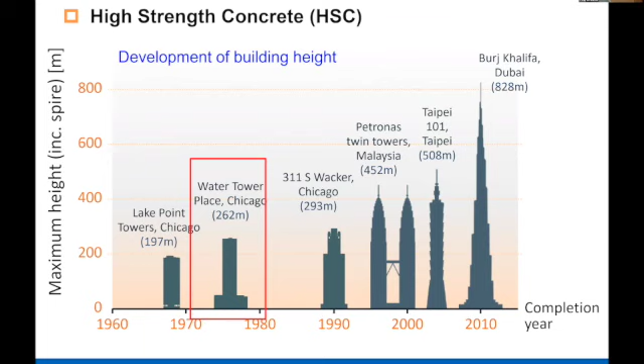So my talk, in the beginning, I'm going to talk about why we need to go in the direction of nanotechnology. As many of you know, we have made tremendous progress in the last few years in improving the strength of concrete. This can be seen if you look at the heights of tall buildings where concrete is the structural material. Here I've shown Burj Khalifa, which is more than 800 meters tall, and a new building called Kingdom Tower in Saudi Arabia, which is going to be a kilometer long, made out of concrete as a structural material. This is because we know how to increase the strength of concrete.

My interest in so-called high-strength concrete started with the construction of this water tower, an iconic building in Chicago, designed by Skidmore, Owings and Merrill. The material supplier said they could give us high strength concrete, and at that time high strength was about 50, 60 megapascals, or 9,000 PSI. They said, okay, show us how strong you can make it.

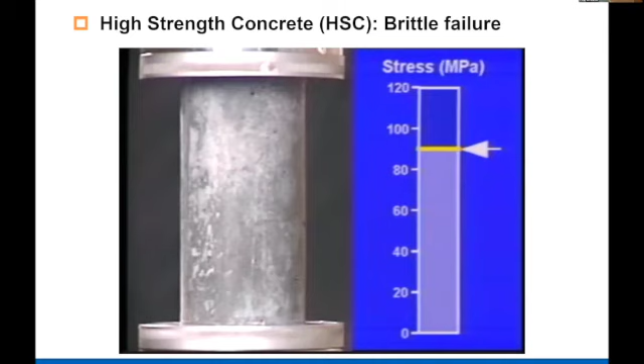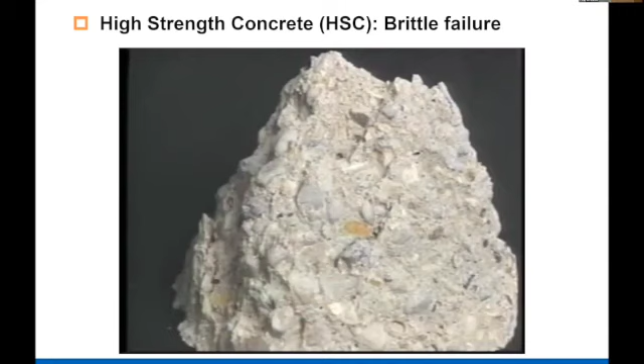So they went to the laboratory and tested a concrete cylinder of high strength concrete, and you can see this goes up to about 100 megapascal, but the failure was very brittle. So they said, how can we use such a strong but very brittle material? That's where they came to my laboratory. At that time, I was at the University of Illinois in Chicago. If you look at the last slide, the collapse was an expansion of circumferential cracking. So we said it's about how you test it.

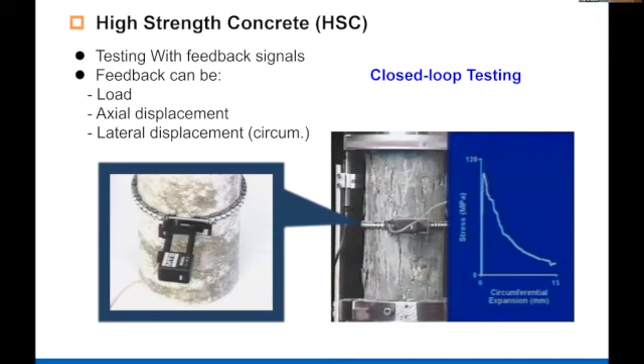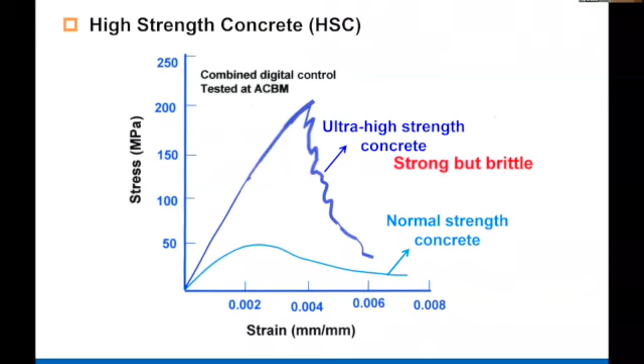If you test the material while controlling circumferential expansion, you get a very stable response, as shown in the next slide. Here I've shown a stress-strain curve when you compress normal strength concrete, which is about 50 megapascal, and what we now call ultra-high strength concrete, which is 200 megapascal. You can see it's possible to get a stable response, but after the post-peak, the ultra-high strength concrete is almost like glass—vertical, very brittle. It doesn't have what we call the strain-softening response of normal concrete. So in order to use ultra-high strength concrete, we have to reduce the brittleness or increase the toughness.

Currently, the main way we do this is by introducing fibers.

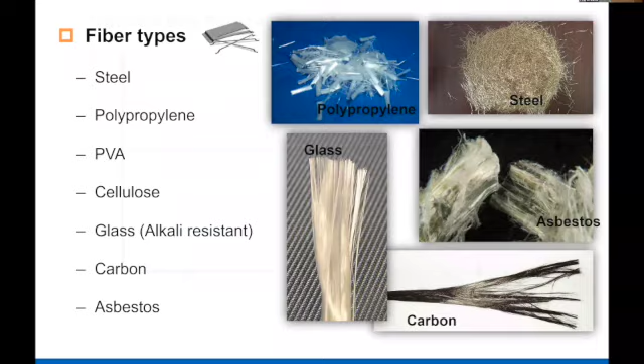The idea behind fiber reinforced concrete came, at least initially, from the classical concept of brittle materials—looking at brittle material using the Griffith fracture criteria. If you look at the relation between fracture and flaw size, smaller the flaw size, higher the tensile strength. So the thinking was that if you use fibers as opposed to pre-stressing bars or reinforcing bars, you can keep them closer together. Initially, the fibers we were using, and still use in fiber reinforced concrete, are about 30 to 40 millimeters long, with an aspect ratio of about 50 to 100.

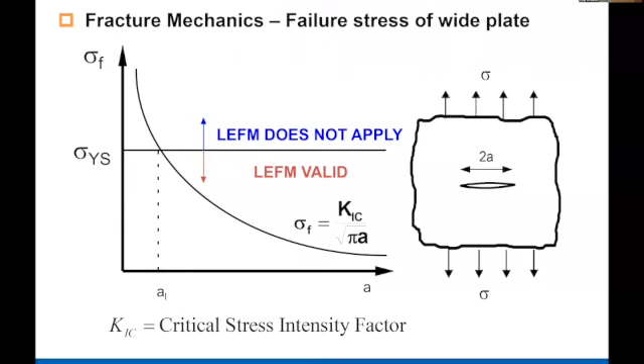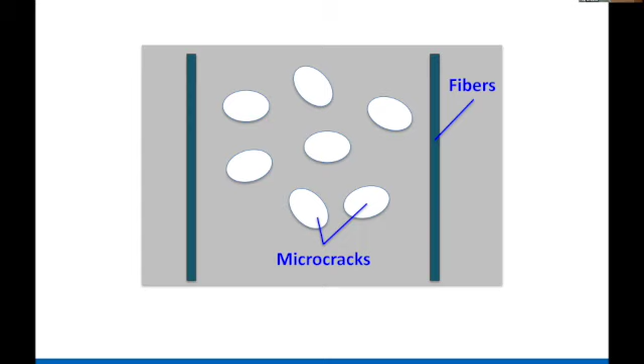It turns out that at that scale, before fibers can 'see' a crack, there are lots of micro cracks already present. So fibers will not be effective until the macro crack or peak stress response occurs.

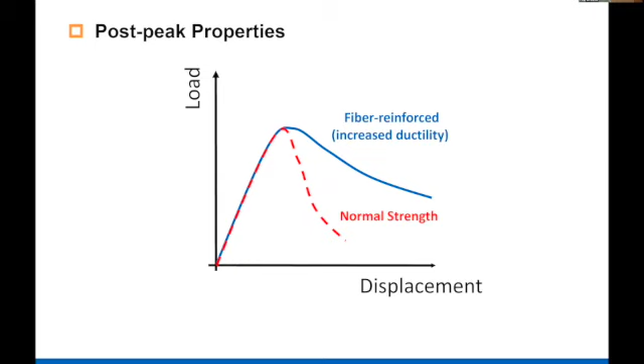But then we said, why don't we use fibers at the micro scale? Here I'm showing you in tension the response of fibers at a micron scale. For example, these were 14 micron diameter PVA fibers, about 2% of volume. You can see that we've increased the tensile strength because fibers can interact with microcracks and have a strain hardening response. This was work done in the 1990s, and the material is almost like rubber, very flexible.

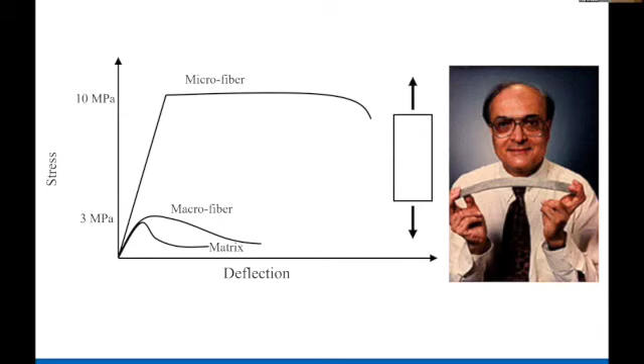So now people are calling this strain hardening cement composites or UHPC. Quite a bit of work has been done applying this concept. For example, here's a slide I took from Lafarge. They tested four concrete beams: the one on the left is what they call Ductal, the ultra high performance with fibers. Next to it is a steel cross section, next a pre-stressed beam, and the last one is reinforced concrete.

They all have the same moment carrying capacity, the same curvature ductility, but a big difference in weight per meter. You can see that the UHPC has the same weight as a steel cross section, so it's quite light, and this is one of the reasons people have been using UHPC.

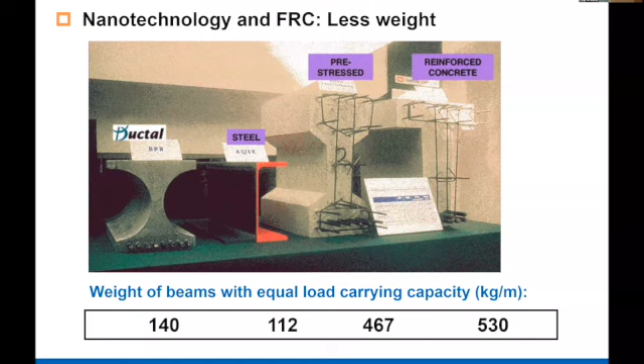For example, here are some buildings where the facade, this one in Paris, is designed in UHPC.

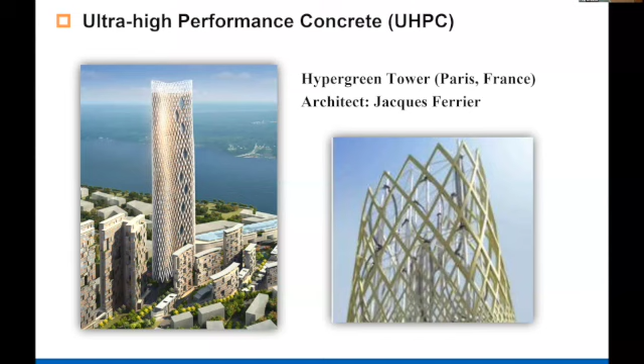At this point, I want to draw attention that when you go from macro fiber to microfiber, you can get strain hardening cement-based composite. So the next thought is, why not use nanofibers? Because cracks start at the nano scale. Many people have been working on using nanofibers, and the most common one is carbon nanotube or carbon nanofibers. They have amazing properties, a modulus as much as terapascal, and excellent conductivity.

What we are using are multi-wall carbon nanotubes or carbon nanofibers. Those of you working with graphene-based composites know dispersion is a big issue because these fibers have a very large surface area. They are about 20 to 40 nanometers in diameter and about a micron or so long. So dispersion is a big issue, and we spend a lot of time solving it.

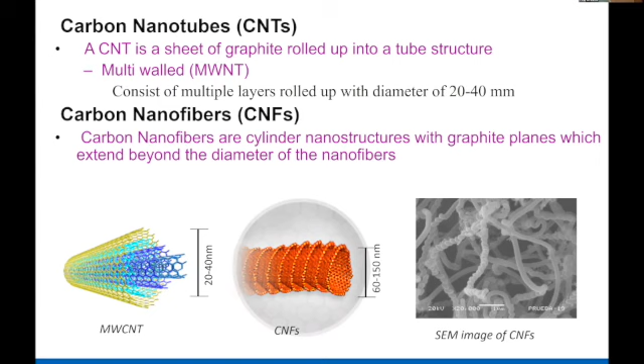So now we are using ultrasonication and surfactant, and we can disperse them well. I'm going to show you some slides of performance of cement-based composite reinforced with carbon nanofiber or carbon nanotube when they're well dispersed. When well dispersed, we use a very small amount.

For example, here are the results with 0.1%. These are the classic fracture tests, load versus crack mouth opening displacement. The blue curve is unreinforced, and the top curve is with carbon nanofibers. We've essentially doubled the flexural strength and also maintained excellent strain softening response.

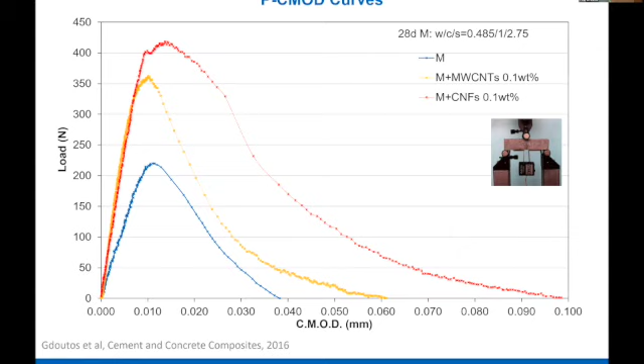Our original idea was to use this for mechanical performance, but we found that because of the nanoscale, they also alter the matrix in ways we didn't realize. For example, we found that addition of a very small amount, here 0.048%, substantially reduced autogenous shrinkage.

For those familiar with this, even if there is no water transport outside, if you use a low water to cement ratio, there is internal shrinkage, called autogenous shrinkage, which could lead to shrinkage cracking. So we want to reduce this.

Here are the results of cement paste with water to cement ratio 0.3. You can see that addition of fiber substantially reduced autogenous shrinkage by about half. We've also shown that it reduces shrinkage cracking, so it does both: reduces autogenous shrinkage, and because of the fiber form, also restrains cracking.

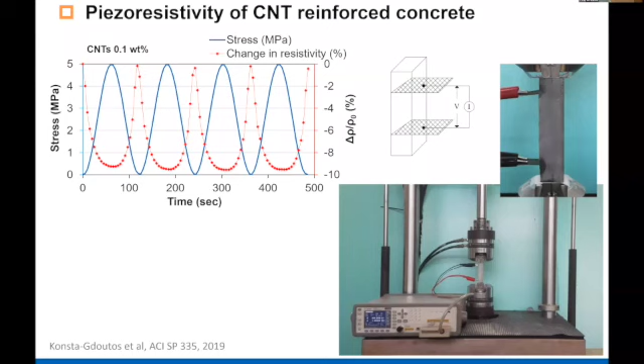For example, you can use them as a sensor in a highway.

If they're embedded as a sensor, you can obviously measure the speeds of the car, but people have also used them in a cold climate to melt the snow because of their good thermal conductivity.

I will come back to carbon nanotube a little bit later, but now I want to talk about work done with other nanomaterials, for example nanosilica, nano limestone, nano clay, and nano titanium dioxide, among others. I'm not going to talk about all of them, but I want to talk about nanosilica because that's probably the most commonly used in development and research material.

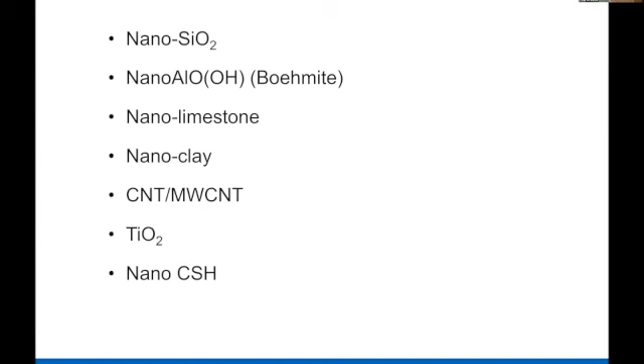There are many ways to fabricate nanosilica. We are using the sol gel process and using it in colloidal form so that dispersion is not an issue. I want to show you three properties which addition of nanosilica can enhance.

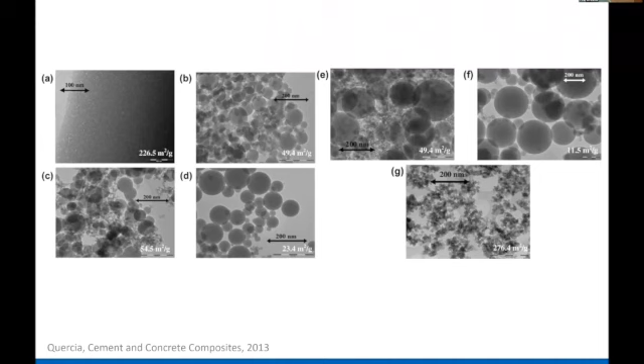One of them is when you use large quantity of pozzolanic material such as fly ash, which is desirable for sustainability, but when you use large quantity of fly ash, the reaction slows down. This is very important in construction where you want a fast response, so this is one of the drawbacks of using large quantity of fly ash.

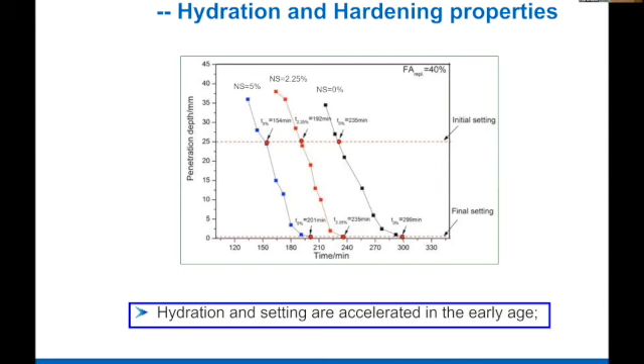Here, for example, cement is replaced with 40% fly ash, and we are measuring the reaction with the Vicat needle test, showing the initial set and final set. You can see that when we use 5% nanosilica, the initial set and final set time is substantially reduced, and this is also mimicked in compressive strength at early age. This is quite important because you can speed up construction using nanosilica.

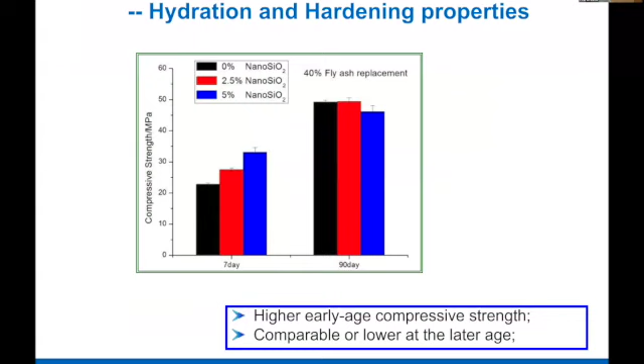Not only compression, but long-term transport properties are also improved substantially by nanosilica. Here, for example, some work we have done jointly with an institute in Spain, where we are measuring calcium leaching. This is very important in storage of waste materials, and calcium leaching means reduction in strength. What I've shown here is the compressive strength at 7 days, 28 days of normal curing, and then 63 days of accelerated calcium leaching.

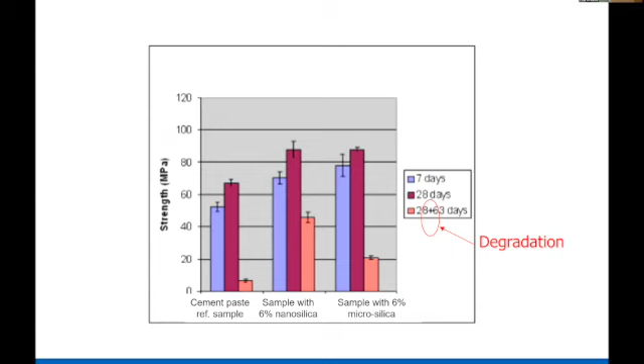The first one is a control specimen, and you can see substantial reduction of compressive strength when calcium is leached out. When you add silica fume or microsilica, which is very commonly used, the reduction in strength is less. But with the same amount of nanosilica, the reduction in strength is even better than with microsilica.

The second interesting use of nanosilica - and I saw briefly the work you've done here with waste material - is with recycled concrete aggregate. So when you destroy or crush normal concrete, or during damage such as tsunami and earthquake, you have a lot of rubble slab. When you crush it, you get concrete aggregate, and we would like to use that as a natural aggregate, especially at the level of sand.

So how can we improve it? People are doing some interesting work. One way is to carbonate this layer so that calcium hydroxide and CO2 fill the pores with calcium carbonate. Another way is to remove this layer by either microwave or heat treatment.

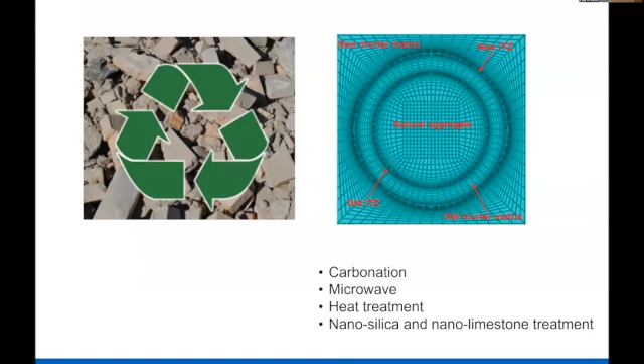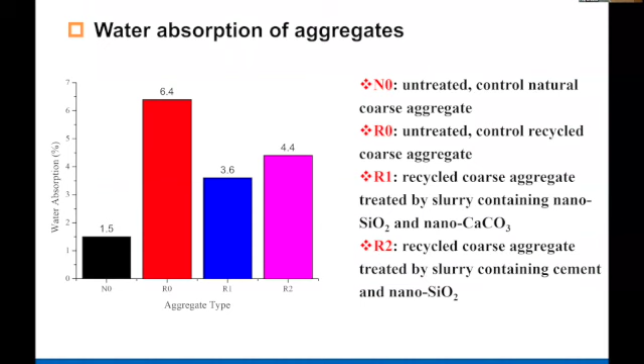Another last example I want to give of using nanosilica is in surface treatment. We know that most of the damage, durability, and corrosion of rebar starts at the surface, so if we can make the surface impermeable so that water and other ions cannot penetrate, that would be very good.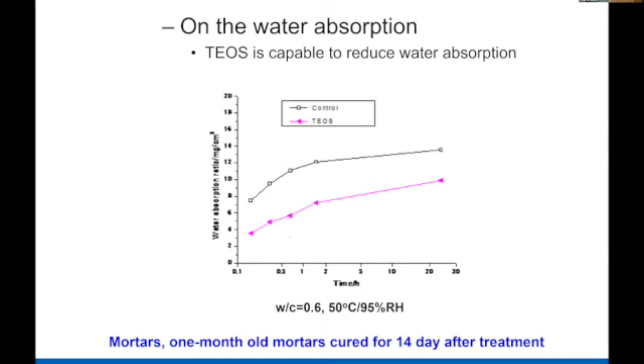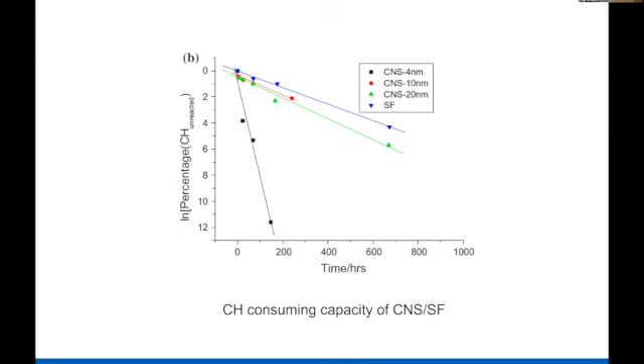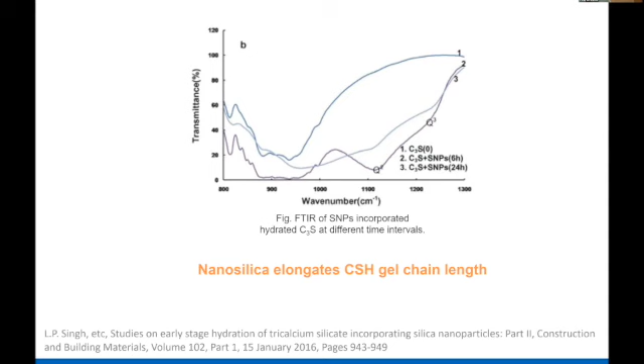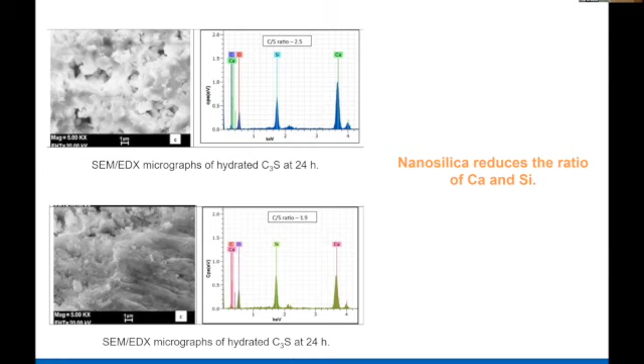We proved that by measuring nano indentation using the Hysitron nano indenter. The advantage of this is you can see where you are indenting, so you can find out what is happening at different nano phases.

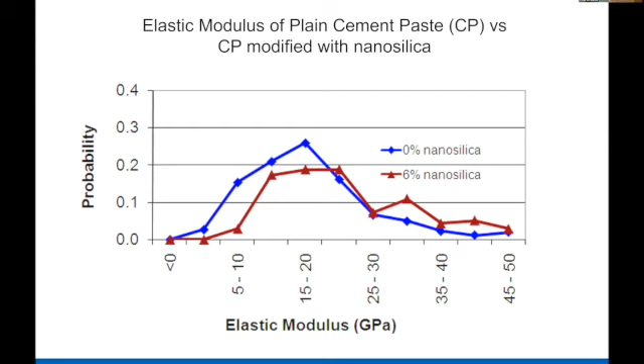So that's the difference. Now I want to talk about another interesting nanomaterial: nanoclay. For example, here we are using attapulgite, which is a magnesium aluminosilicate. We process it by calcining and purifying, then use ultrasonication so that it's separated into nano plates.

I want to show one very interesting observation of nanoscale effects in rheology. This is becoming important, for example, in 3D printing.

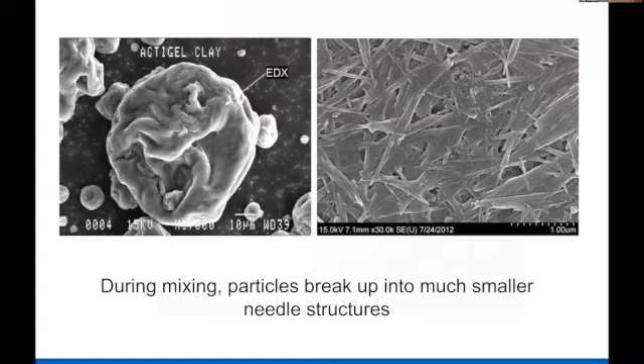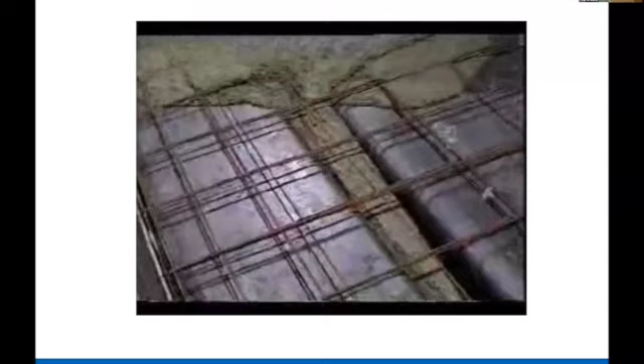What I want to show you is one application of nanosilica and nanoclay in self-compacting concrete. As you know, self-compacting concrete is a concrete which flows like water, as shown here. The advantage is that you can pump concrete almost a kilometer, and this is one reason why super tall buildings are cost effective compared to steel, because you can pump concrete all the way to the top rather than bringing sections one by one.

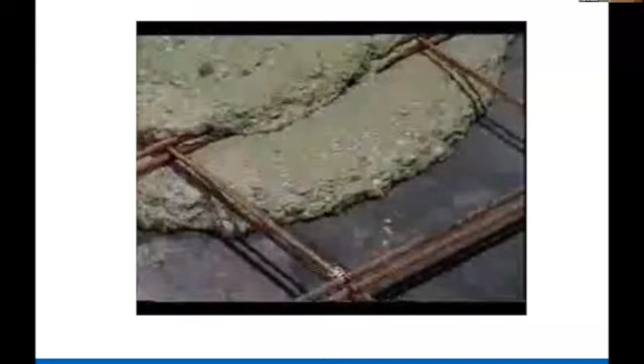But one issue with self-compacting concrete is that when you pump it like water, and it reaches the top still behaving like water, the hydrostatic pressure at the bottom could be like water pressure. That means formwork design has to be changed, because in conventional vibrated concrete you'd place it slowly enough that the pressure at the bottom is less than hydrostatic. So can we have concrete which flows like water but still has lower hydrostatic formwork pressure?

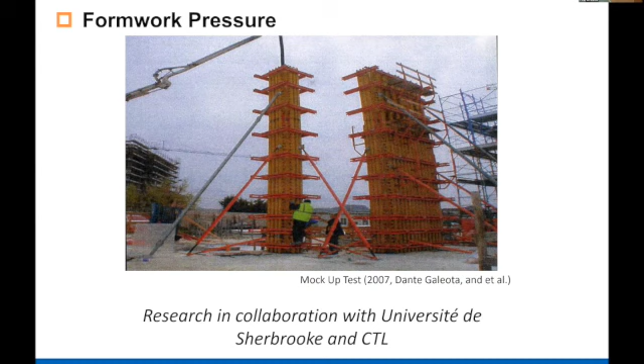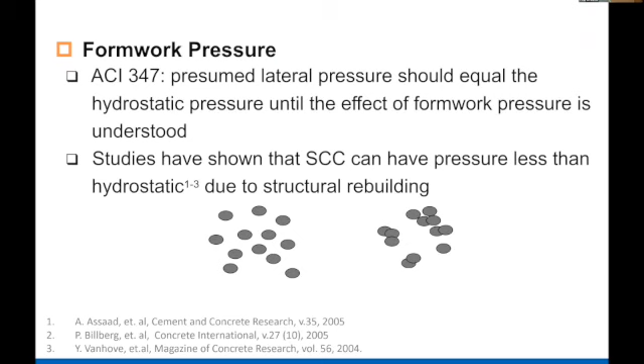I will show you that you can do it by addition of nanoclay. What happens is that when you stop vibrating or pumping concrete, the particles coagulate and can transfer stresses, which we call thixotropy. It's like blood, which is thixotropic — if you bleed, blood coagulates and doesn't continue to flow.

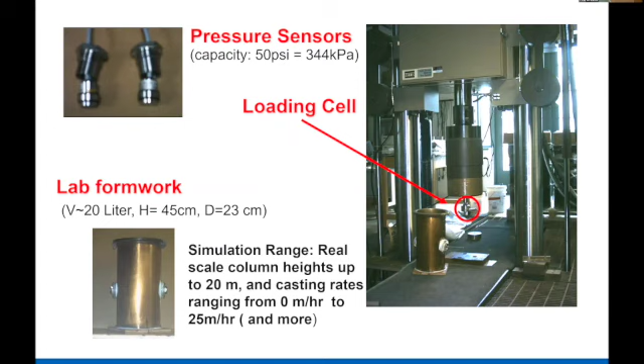So what we did is cast samples of concrete with and without nanoclay and measured both the vertical pressure and the lateral pressure, which would be the formwork pressure. I want to show you some results of the effect of nanoclay. What is plotted here is pressure versus time after casting, and you can see we are talking about the first couple of hours, long before what we call initial set.

The pressure is increased step by step. This is the vertical pressure, and this is the measured horizontal pressure of the control specimen. If it were water, the vertical and horizontal pressures would be the same, but because of thixotropy, the horizontal pressure is less.

But when you add 0.3% of nanoclay, the lateral pressure is reduced even further, and this is very important.

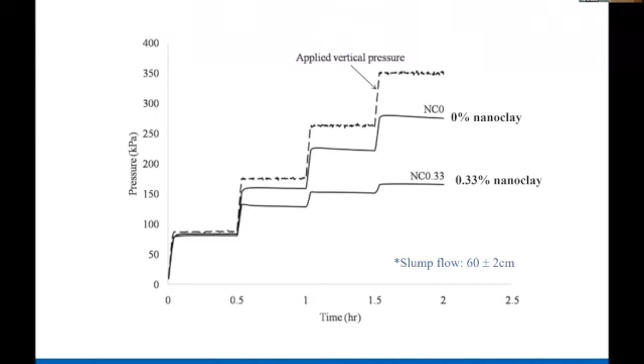Those of you working with 3D printing can see that when you have layer by layer construction, you want the bottom layer to support the subsequent layer. Thixotropy can be a very useful tool for that.

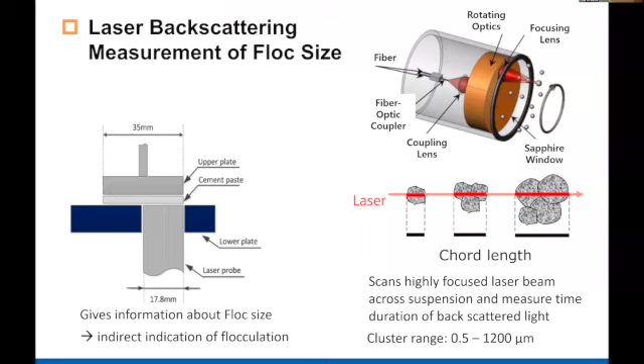A lot of people are working to understand what happens during mixing, understanding the rheology. One of my former PhD students, now in Korea, developed a parallel plate rheometer with a window where a laser is aimed, as you can see on the side. From the backscatter laser light, you can calculate the size of the particle, and as you vibrate it, see how the particles coalesce when you have nanoclay or superplasticizer. This is a very important study, but I'm not going to go into detail.

In the last part of my talk, I want to discuss what we call metamaterials, and in particular metaconcrete. What are metamaterials? In the traditional material science approach, you process material, examine the microstructure, and connect it with property.

For example, in concrete, you make a mixture, add whatever you want, and then see what happens in the microstructure and measure properties like compressive strength. In the metamaterial approach, you instead say: what property do I want to improve, whether it's compressive strength, fracture toughness, or transport property, and then how can I fabricate a nanoscale hierarchical architecture to achieve that. The key is how you can fabricate that.

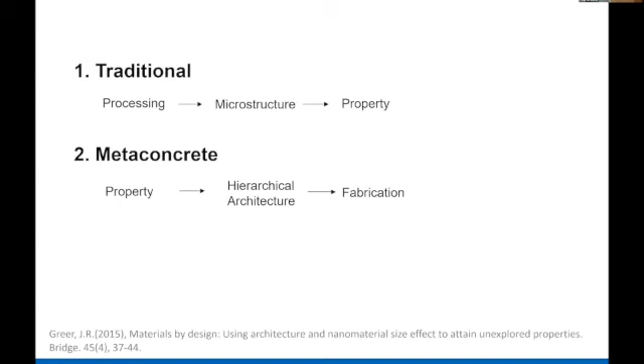I want to give you two examples of this approach. One came almost accidentally to us. There was a roundtable meeting of all the people in the Chicago area working in ready-mix concrete and admixtures, along with structural engineers, and they wanted to increase the modulus, to double the modulus of concrete.

Why would you want to double the modulus of concrete? With super tall buildings, strength is of course important, as I mentioned earlier, but deflection, whether due to wind or earthquake, becomes very important. For good design of super tall or tall buildings, they want a modulus close to 60 gigapascals, or 8 million PSI. Currently we have about 4.

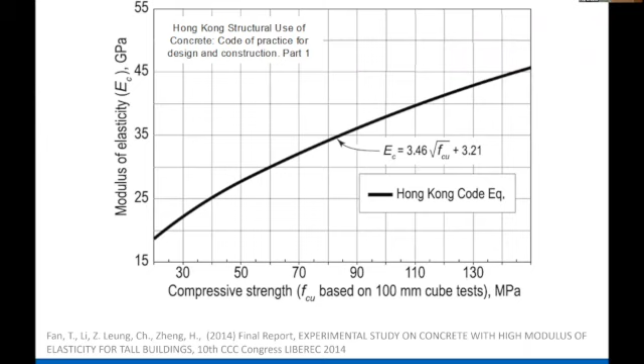But higher strength means higher cement content, higher cost, and as we know, the material also becomes more brittle. So is there another way? After that workshop, I went back to our group in the lab and realized we had not really paid much attention to modulus with the addition of nanofiber, carbon nanotube.

Here I've shown the modulus of cement paste with 0.1% of multiwall carbon nanotube, and you can see we increased the modulus by about 60%. But this carbon nanotube is added at the nanoscale in the cement. Of course, high-rise buildings are not made of cement, but of concrete, and we were not doing anything to the aggregate.

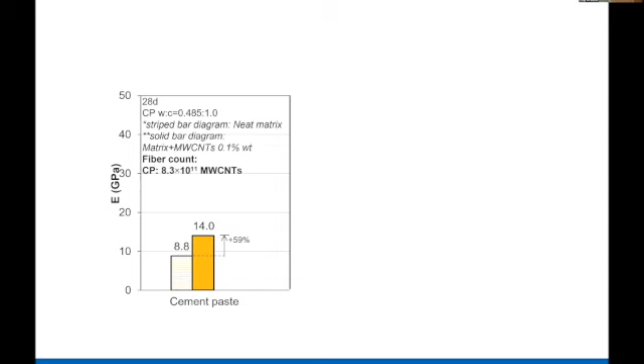We suspected that with the same amount of nanotube added alongside sand, the effect would be proportionately less. We were surprised that was not the case. This is a mortar specimen with the same amount of nanotube, 0.1%, and you can see we increased the modulus even more, even though we did nothing to the sand.

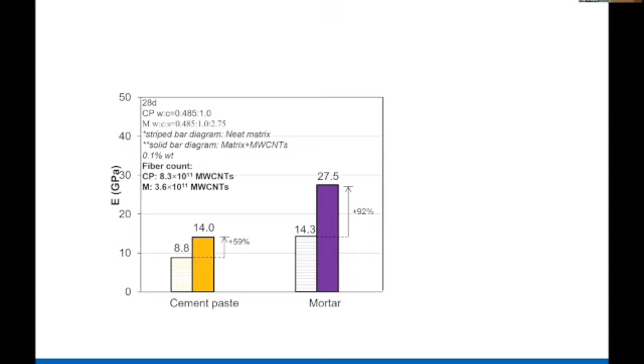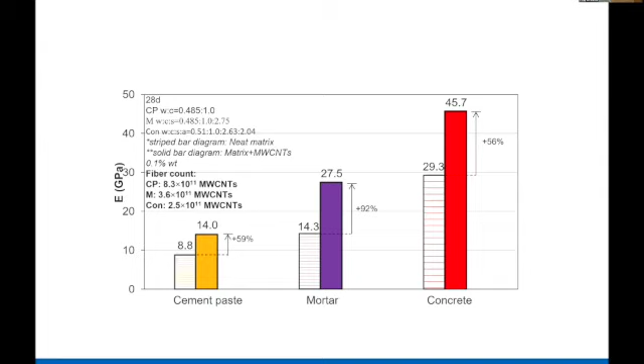Then we checked concrete, and to our surprise, while a normal composite material approach would predict very little increase from adding just 0.1% by weight, here we see a significant increase. So we tested many concrete specimens, and here is one set of results. If you look at plain concrete versus concrete with 0.1% nanotube, there isn't much increase in compressive strength, but there's a substantial increase in modulus of elasticity compared to plain concrete.

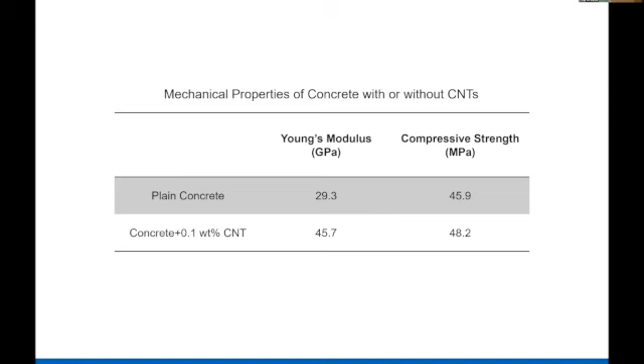What does that mean? If you look at the chart I showed you before, here we are: when we add 0.1%, I get 45 gigapascals without increasing compressive strength. That's a substantial reduction in cement and an improvement in sustainability. This is one of the important attributes of carbon nanotube.

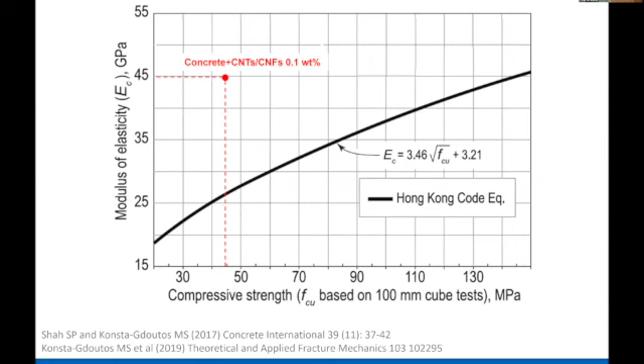Now, why is CNT, or carbon nanofiber, proportionately more effective in concrete than in cement paste? Clearly, you can probably see the idea is the interface.

The interface between aggregate and cement is rather porous, and we suspected that addition of nanofiber alters that interface. To check that out, we did some combined analytical and experimental work.

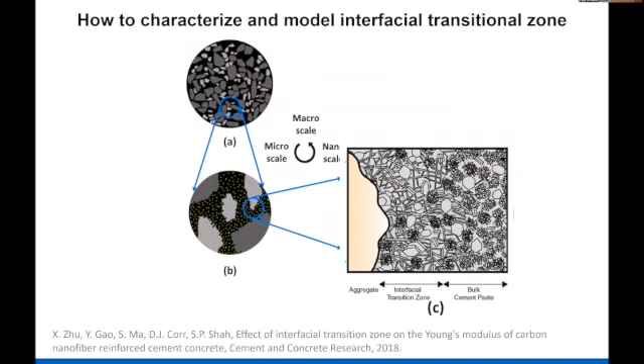First we look at the solution of a three-phase material: spherical aggregate surrounded by an annulus interface in a matrix, an infinite media. You have an analytic solution if you know the modulus of the three phases: aggregate, interface, and matrix.

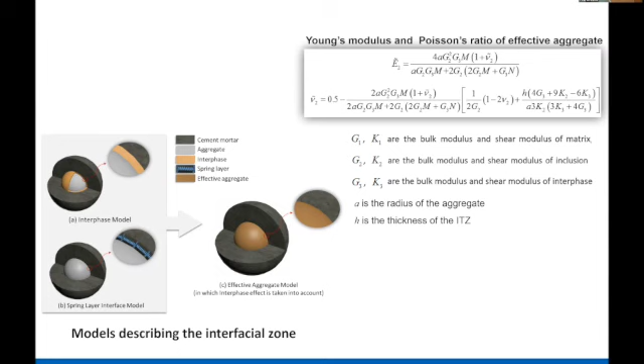Then we made two sets of concrete specimens, one with less aggregate and one with more aggregate. But to use that model is only good if the aggregates are spherical.

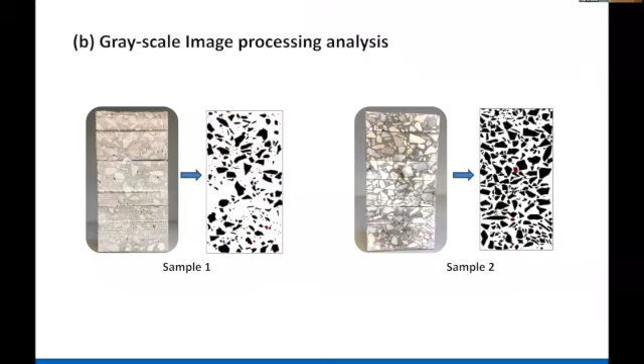So we calculated for each aggregate, by doing a grayscale analysis, its surface area equivalent sphere. Then we can calculate using the analytic method the modulus of the composite, and then do FEM to calculate the modulus. But each aggregate has a number and a different modulus.

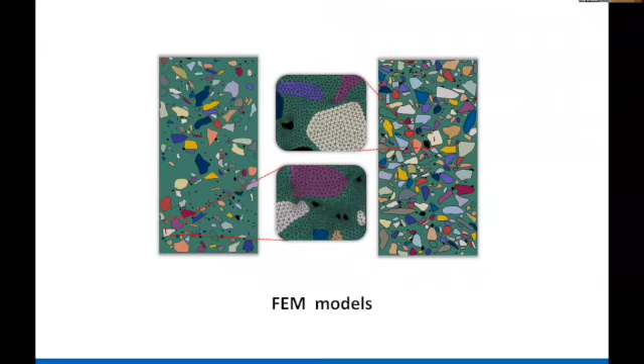So then we did FEM analysis, but before I go to the model, we need to know three things. We need to know what is the modulus of the aggregate.

To measure the modulus of aggregate, we pick some aggregate randomly and use ultrasonic pulse velocity to measure there. The modulus of matrix, obviously, is a conventional ASTM test.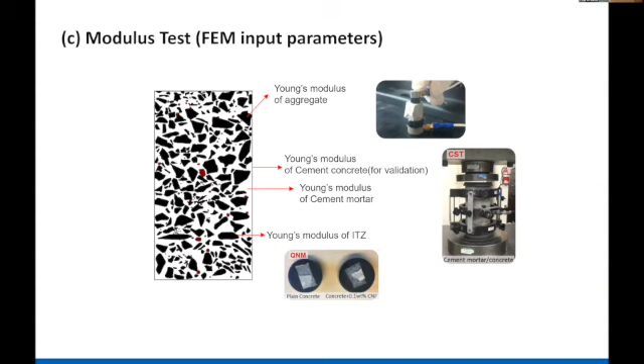Modulus of interface was somewhat challenging because interfaces are only a few microns wide. If you use classical nano indentation, because they leave an indent which is a few microns, you really cannot measure the interface. So we use AFM in a quantitative nanomechanical test, and I've shown some detail here.

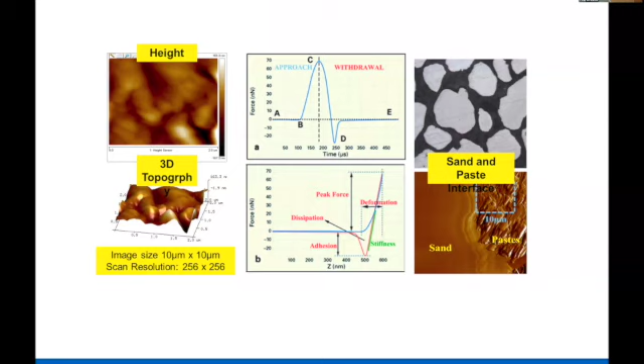You can see that for a 10 micron by 10 micron area, we have a 256 by 256 measurement, so the scale is in the nanoscale. When using AFM, as I've shown here, the modulus is obtained from the slope of this curve.

So here I've shown the modulus as measured with this AFM of matrix with interface, with and without CNF. And clearly you can see that with CNF, shown in blue, the modulus is substantially higher.

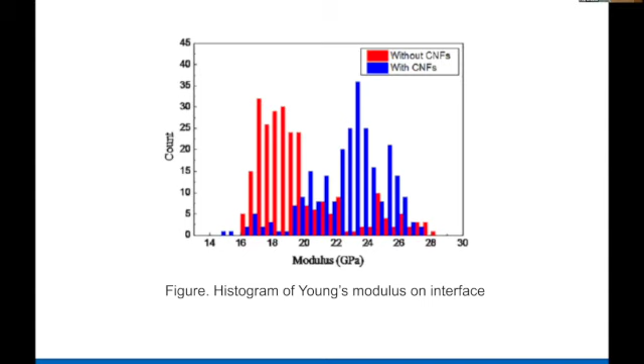So then we put this measured value into the analysis. All three measured values and the predicted value show that the match is very good.

The important thing to note is sample 1 and 2. Sample 2 had twice as many aggregates as sample 1, but the increase in modulus is not that much because of the weak interface. But sample 3, which had CNF, the modulus is substantially increased.

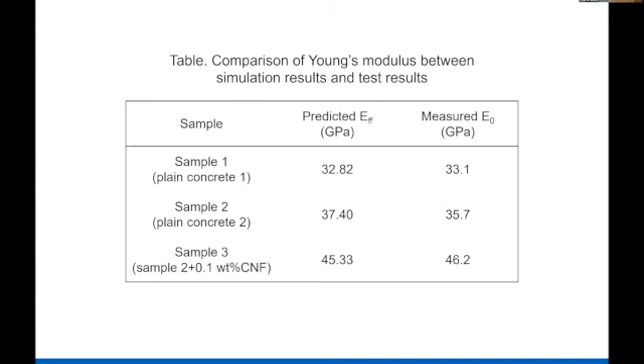We also did, and continue to do, work to see the calcium to silica ratio in the interface when there is carbon nanofiber and when there is not. You can see the calcium to silica ratio is different.

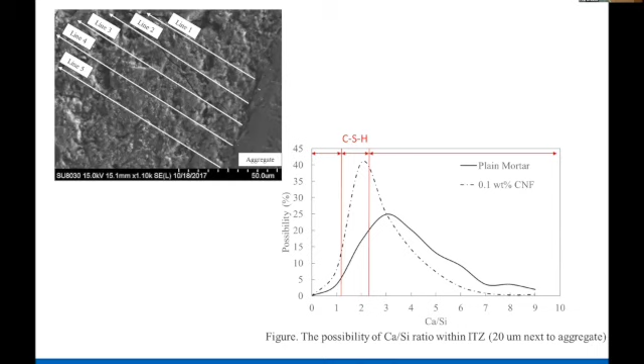We have also shown that the size of calcium hydroxide crystals are smaller with CNF. So the addition of CNF fundamentally alters the material at the nanoscale, and this then increases the modulus.

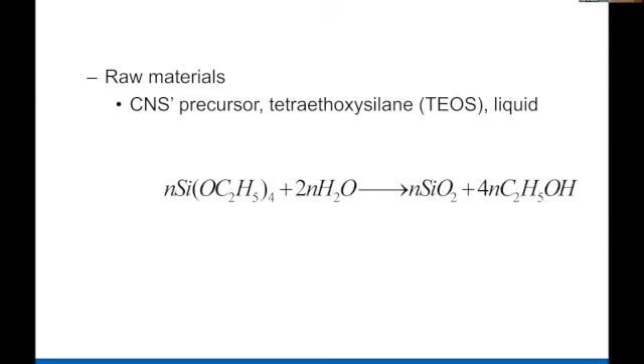The second example I want to give is surface coating. I mentioned that when the surface is treated with TEOS, it deposits nanosilica, and with the pozzolanic reaction, you have pores filled with CSH, which improves the permeability.

But if you compare the absorption of a control specimen with TEOS or sodium silicate (water glass) versus silane, which is hydrophobic, silane is much more effective in repelling water and not having water transfer. But there are other disadvantages of silane.

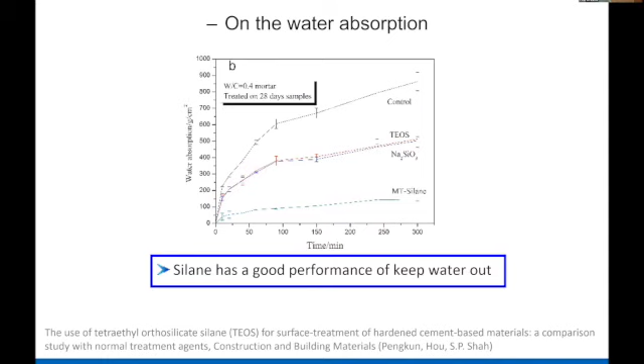So can we combine the hydrophobicity of silane with the pore filling of nanosilica? This is work we are doing with Jinan University - I think Qianmin is also involved with Jinan University. We are using a so-called core-shell approach.

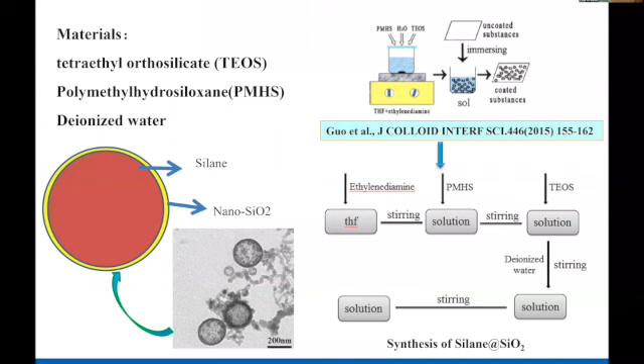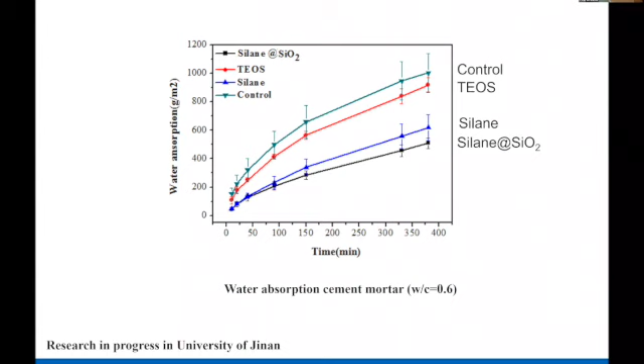So I think this is now an interesting direction to go as far as application of nanotechnology is concerned. So I want to summarize and then talk briefly about what direction we are going.

Nanosilica, as I mentioned, is a widely used nanoparticle with many advantages: in high volume fly ash and calcium leaching, in improving absorption of recycled concrete aggregate, in surface treatment, as well as in modification of nanostructure.

Nanoclay, I only talked about rheology, and as I said, it increases thixotropy, but people have also shown that addition of this calcined purified nanoclay has a lot of improvement in durability and other properties as well. Carbon nanotube, we talked about it, and briefly we talked about metamaterials.

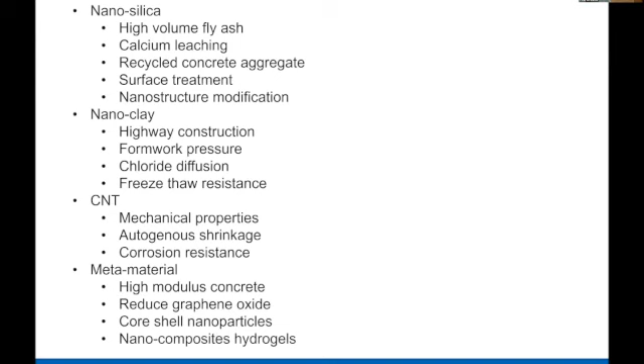So currently, what directions are people in my group and other people taking? Well, cost is of course a major issue when you talk about construction material. We are talking about using carbon nanofiber or carbon nanotube as an admixture, at about 0.1% by weight of cement. So it's very similar to the cost of other admixtures, so it could be cost effective. But the main issue is still the dispersion. We have done it in the laboratory, but scaling up is obviously a key issue.

We have now started using an ultrasonicator at a somewhat larger scale, so that we can test large scale concrete specimens.

The core-shell approach has many possibilities. One of them is titanium dioxide. Titanium dioxide has been used to create self-cleaning surfaces because of its photocatalytic property, it oxidizes pollutants and washes them out. Currently, for example, this is used in an extension of the Kennedy Center in Washington, where they mixed titanium dioxide in concrete. But titanium dioxide is expensive, and you don't need it in the whole concrete, you only need it at the surface. So why not do it at the surface?

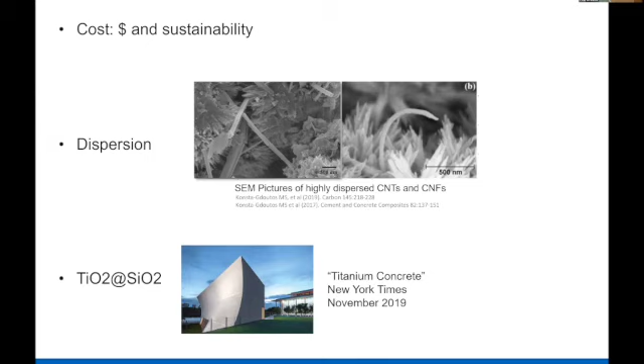Well, the issue is that when you spray titanium dioxide on the surface, it doesn't bond well, the bond is very weak. So work has been done to have titanium dioxide with silica, a core of titanium dioxide surrounded with nanosilica. So you have both hydrophobicity and pore filling, and they have shown very good results with this. It's also cost effective because you only apply it at the surface.

There is a lot of work. I only talked about carbon nanotube, but there are obviously other nanofibers, quite a bit of work being done on nanocellulose fibers, which we are continuing. And I only talked about CNT, but quite a bit of work is done with what we call graphene-based composites. For example, Professor Shih has done quite a bit of work with graphene oxide, GO. People are also working on reduced GO and other graphene type materials. In fact, RILEM has just started a new committee on graphene-based composites, where both Professor Shih and I are members.

When you use graphene-based composites such as CNT, they are conductive, I showed you their piezoresistivity. So if people ask, what about the corrosion of rebar? Because corrosion of reinforcing bar involves galvanic current, that's an issue. We have found out that in fact, when we add CNT, corrosion is delayed. We are still exploring it, but one of the reasons is the frequency: galvanic corrosion happens at almost DC level, where the fibers are not there, so they're more insulating than conductive. So that is one area.

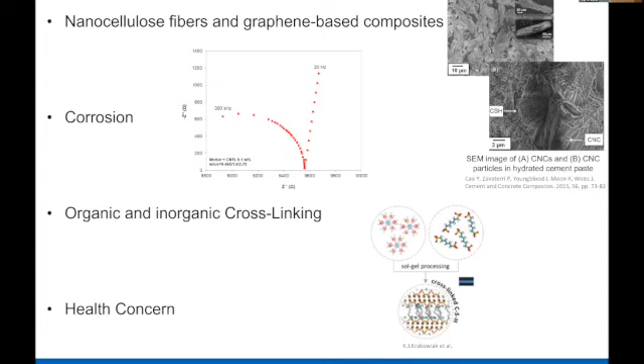Clearly with nanomaterials, people always have to worry about health. So far, at least with CNT, people have shown that it doesn't have the same health problem issues that you have, for example, with asbestos fiber. So I hope I gave you some idea about what is happening as far as the application of nanotechnology to cement-based material. Thank you.

You mentioned a type of nanoclay I'm less familiar with. I'm more familiar with Montmorillonite. Can you comment on the difference?

I don't really know. People have used nano kaolinite quite a bit, and we have used attapulgite. I don't know whether any work has been done with Montmorillonite clay, but if you can calcine it and separate it, then it would be worth looking into.